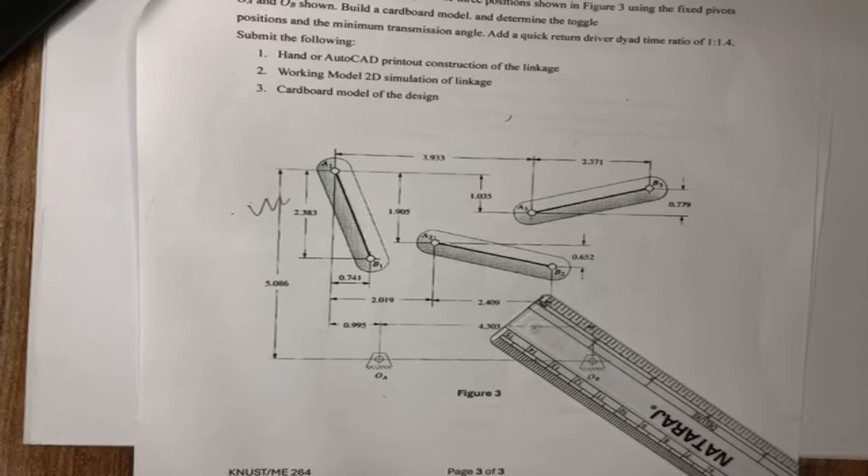Okay, then I think we can begin. So the video is lagging, right? The stream is lagging. I don't know why. Okay, let me try. Whatever happens, let me know in the chat. All right, I'm looking at it. Okay, can you see? Okay, I think everybody can see them.

So let's begin with assignment 6. So this is a fixed pivot problem. The question says design a 4-bar mechanism to give the 3 positions shown in figure 3 using the fixed pivots OA and OB. Then you're supposed to build a cardboard model and determine the toggle positions and the minimum transmission angle. And then add quick return driver dyad. That's the time ratio 1:1.4. Okay. So let's get into it.

So yeah, I know, but can you follow up? I understand it's lagging, but can you follow up? All right, sure.

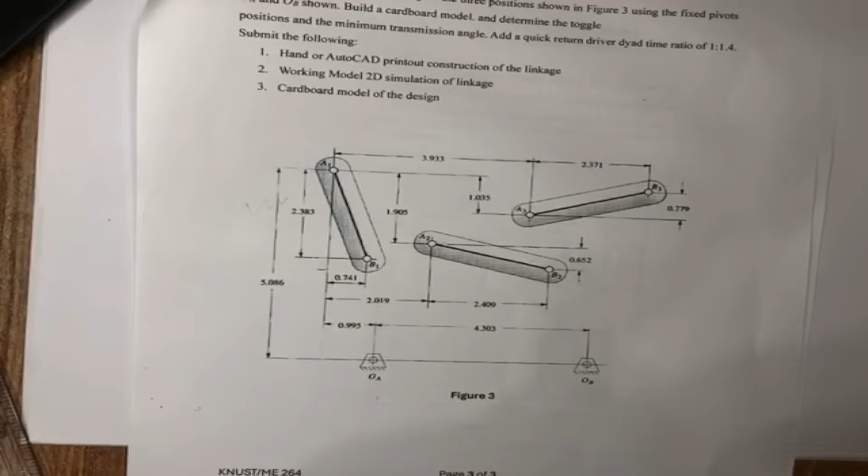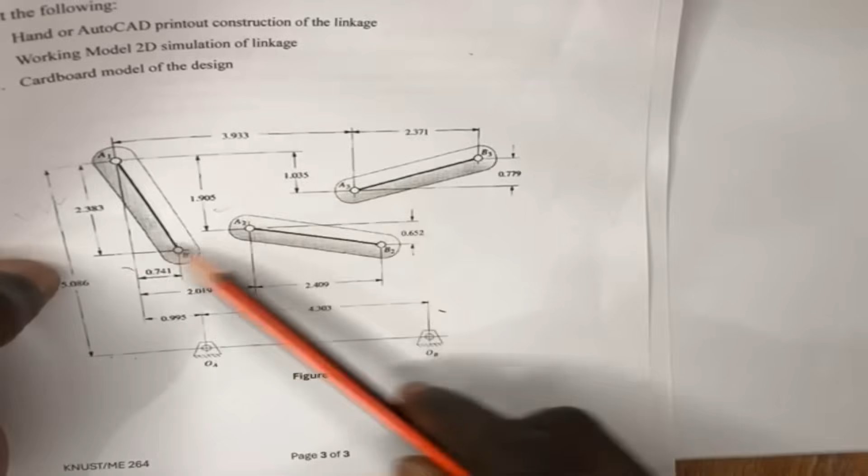So we are going to work on this, which is a fixed pivot problem, or a specified fixed pivot problem. Now you could see that on the diagram you've been given some numbers, right? These numbers are there such that if you want to redraw this on a white sheet, you use these numbers to transfer them from here to here. Under normal circumstances we should use something like AutoCAD to draw these links and then print them before we work.

Now you can choose to work on it, but because of the numbers it will make your work very messy, right? So I want to transfer them onto the page, and this is what I'm going to do. Just align the sheets on one of my A4 sheets. I hope you all have your questions and solve with me. Don't just watch, have your assignment by your side and work as I do. Any question you have, let me know in the chat and I'll respond.

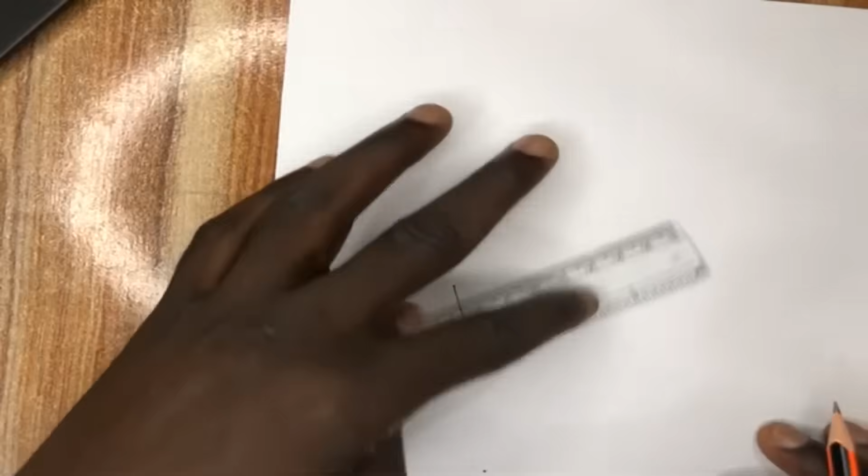So instead of redrawing them, I will just use the divider to locate my points. So this is for OA, OB. And I'll locate A1, B1, A2, B2, and then A3, B3. All right, so having done this, I will now come, so this is for OA, OB, and then A1, B1 is here. Then A2, B2, and then A3, B3.

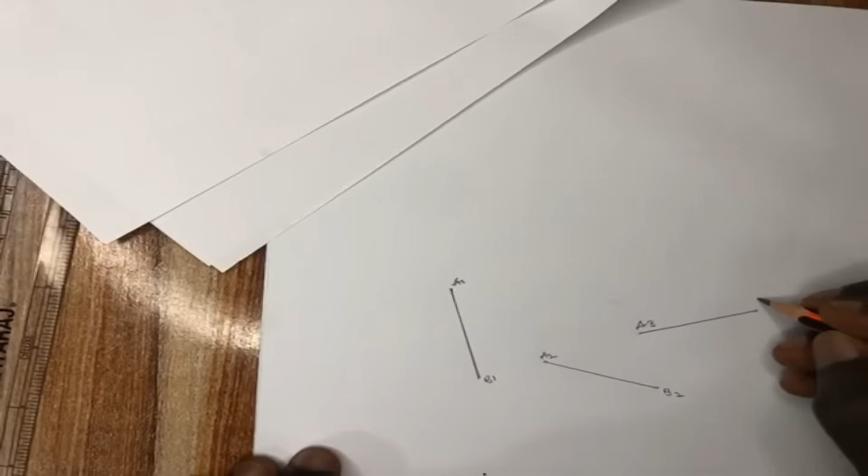All right, so A1, B1, A2, B2, A3, B3. Okay, so this is what we have now. Let me label this one OA, OB.

So now, from our understanding of the fixed pivot method, we have to relocate the other positions. First, we will assume the specified fixed pivot as the moving link, and then use the triangulation method to locate the other two positions. Then we can design the linkage, and when we finish, we do link transformation. So knowing that OA, OB is our specified fixed pivot, I want to make it a link.

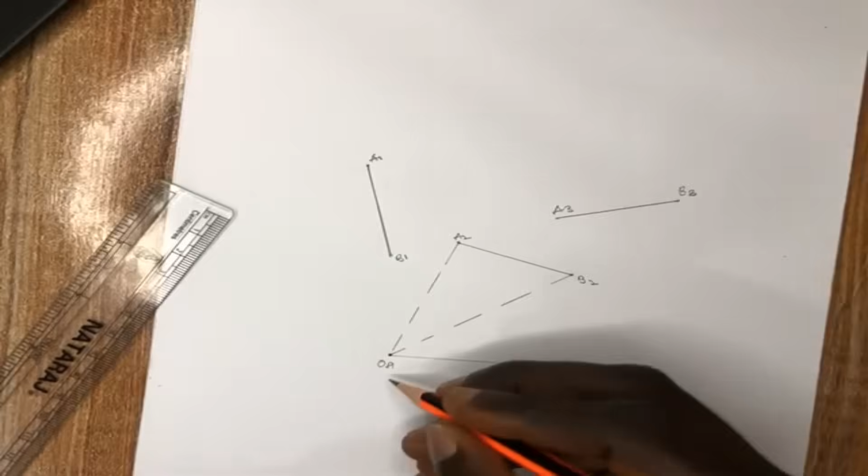All right, then I'll use the triangulation method. So let me just use some short dashes. So with A2, OA, then B2, OA. So instead of using OA and OB, well, we can use that, or I can just make this one E and this one F, anyone you want.

So you use your compass, you pick the distance from A2 to OA, then you come to A1, you make an arc, then you come to B, OA, you come to B1, you make an arc. So where it meets becomes our OA prime, or we can make it E2. So this one will become E1. Any one of your choice. Great. Then you will do for F2. So you join these with short dashes.

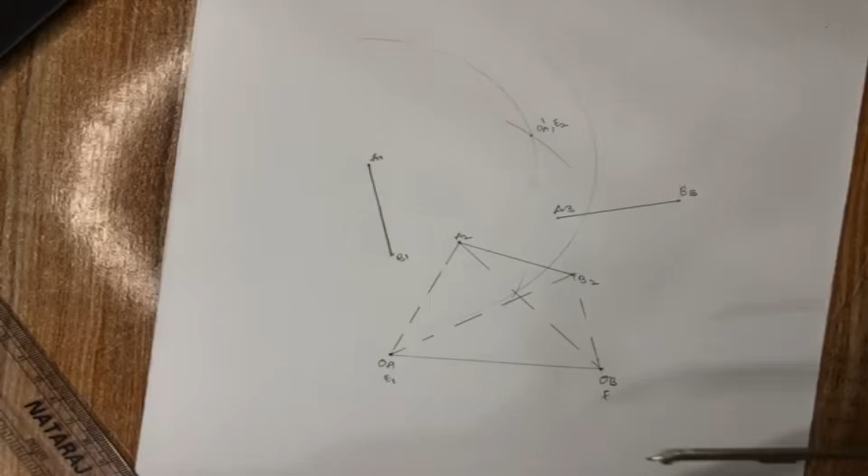Then you measure A, OB. Then you come to A, make an arc. Then you come to B, make an arc. All right, I'm coming. So A, OB. It's an arc. And then B, OB. Okay.

So the B, OB, this triangle can only meet at this point. And where this one meets is far away. Let's check the distance first. So from here to here is 6.9. Oh, okay. The same. All right. So this one will meet somewhere here. So you make this one F2 or OB prime. So that will give you the second position for the link E1, F1.

Don't forget, we have just changed OA and OB to variables E and F so that writing them will be easier for us. So here, our OA prime will become E2, and our OB prime will become F2. Okay, so now that we are done, we will use triangulation with A3, B3, and then find the third position for the specified fixed pivot.

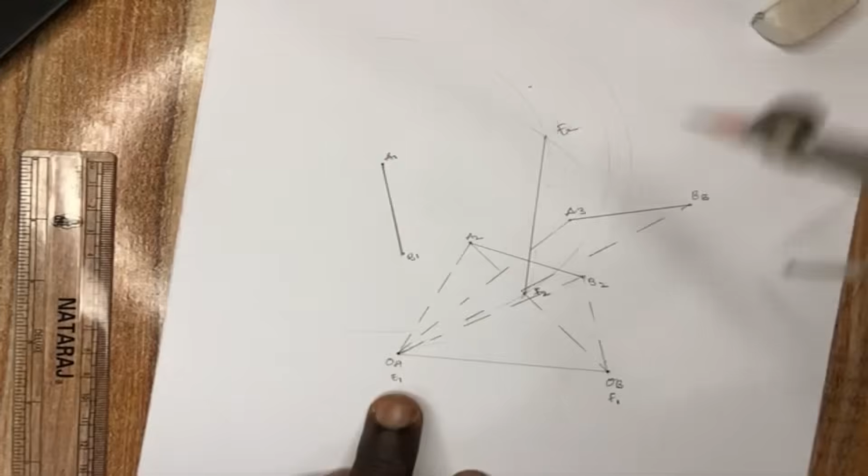So that's to join A3 to this, and then B3 as well. All right, so A3 to E1, B3 to E1. So you pick A3, E1, you come to A1, you make an arc, and then B3, E1, you come to this. Okay, it's meeting somewhere there. So we have E3 somewhere here.

Then we join A3 to F1, B3 to F1.

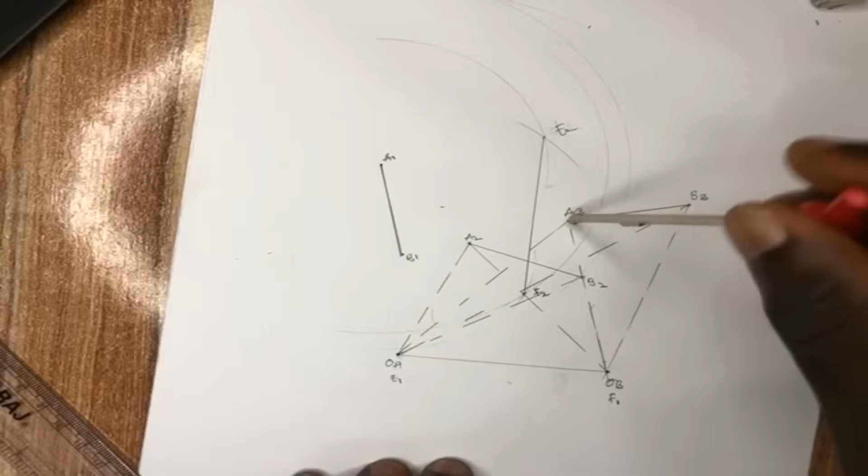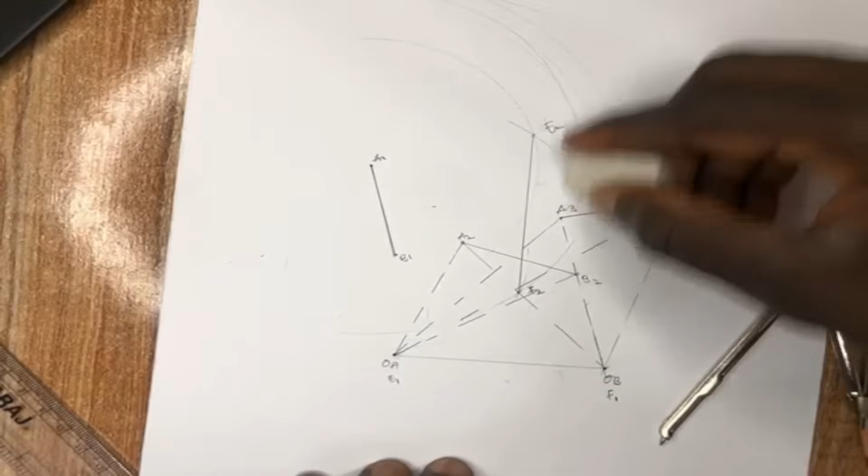Then pick this, you come to A1. The lines are very messy, so we just have to stick with the method. So A, F1, we come to A1, make an arc, and then B, F1, we come to B1, make an arc. So that one also met here, and that gives you your F3. So if you join, you have E3, F3 here. So our three links are the E1 F1 link, E2 F2 link, and E3 F3 link.

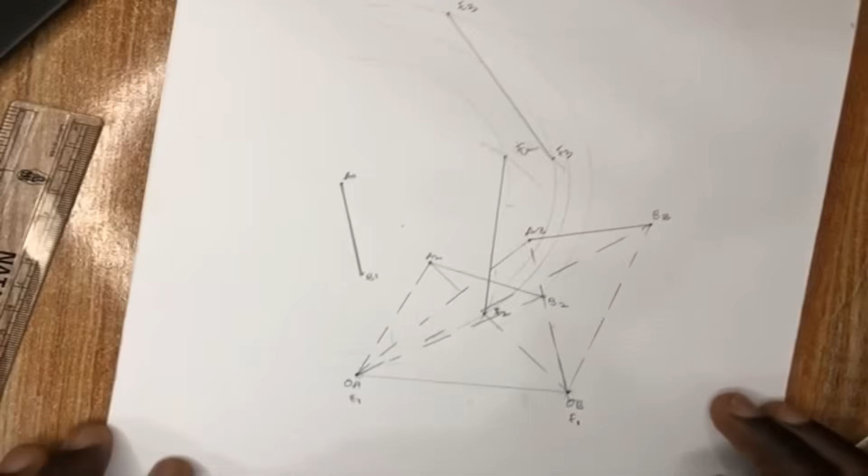So now that you found the three positions for the specified ground link, the next thing is to design a rocker output for the new links that you've generated. We do that by joining. My work is very messy, so just follow what I say. We have three links: E1 F1, E2 F2, E3 F3. We follow the normal process of drawing a rocker. You join E1 to E2, E2 to E3, do the bisection, then F1 to F2, F2 to F3, do the bisection and locate the pivot point. If you are following, you can do this at your end.

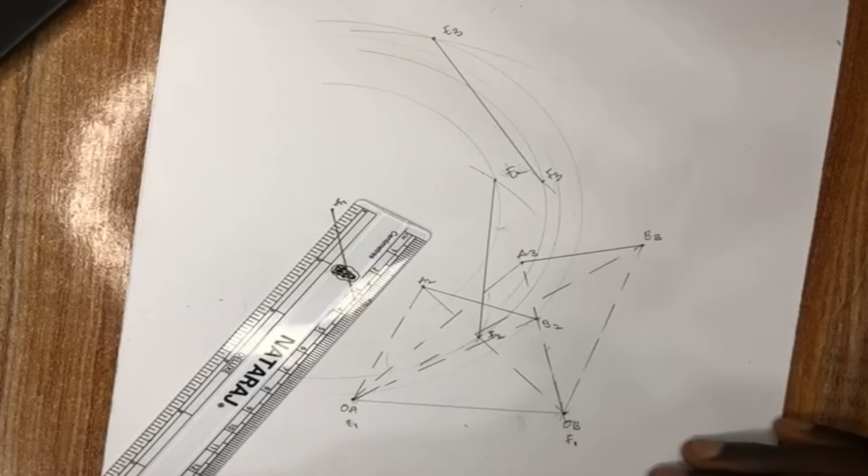Okay, so we join E1 to E2 with short dashes, and then E2 to E3 with short dashes. Then we bisect them. And then we come to E2, E3.

Okay, looks like it won't fit on the page. In your work, since this question hasn't been solved before I began, maybe you can just reduce the length. They gave us the values, right? So you can use a scale to scale them down so that it fits the page. For the sake of the work we are doing, I'll just extend the sheet a bit and do it on it.

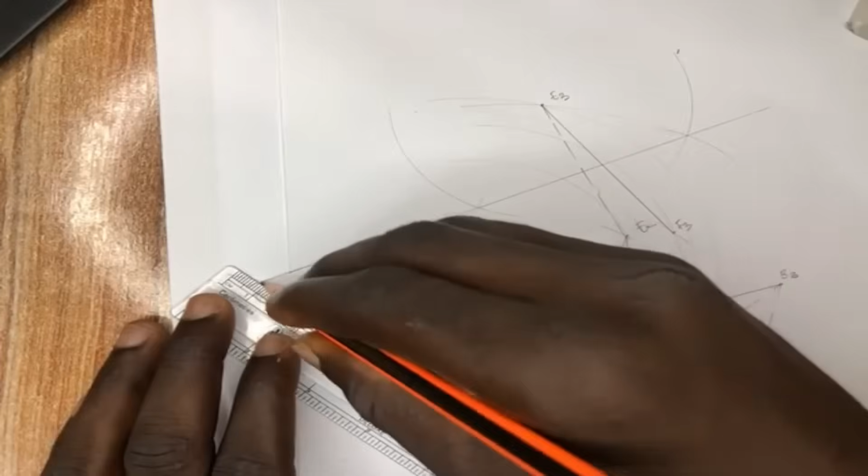Okay, so this will give us the fixed pivot for E. We can label that, say, O2. No, let's make it G, right? So you connect E1 to G, E2 to G, and then E3 to G.

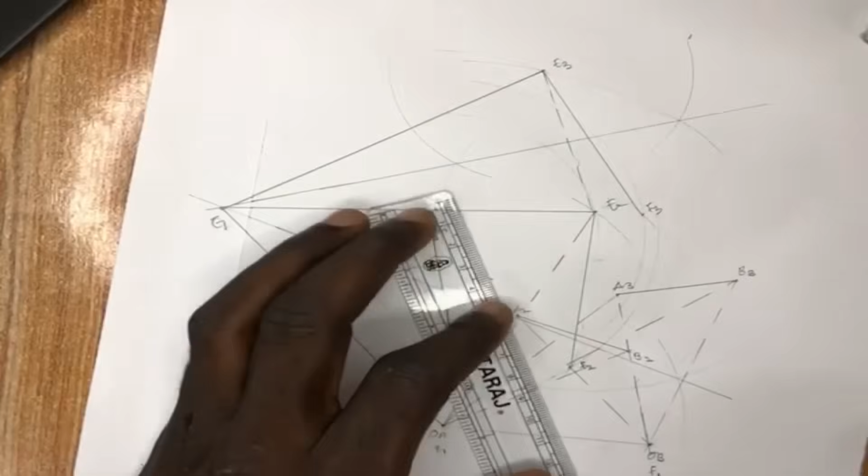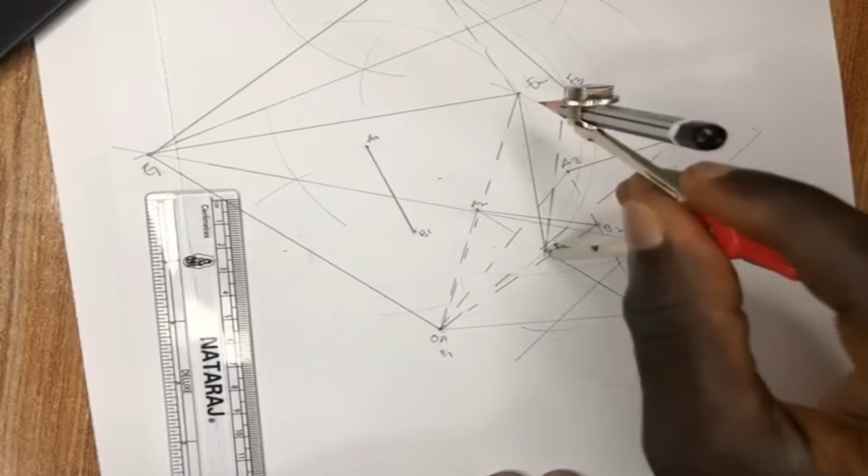Next is to locate the center for F. So we join F1 to F2, F2 to F3. F1 is here, F2 somewhere here, and F3 is here. All right, so F1, F2, and then F2, F3, more than half.

All right, then we join this one. So they meet here, and let's say this will be our H. So we join F1 to H, F2 to H, and then F3 to H. Up to this point, who has any question before we move on? It's very clumsy. What I'm saying is that the ground points H and G are moving this link from this position to this position and to this position.

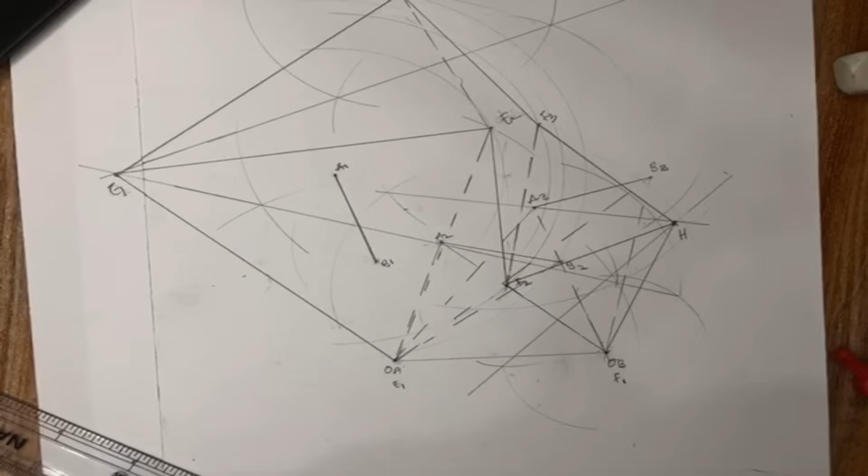So the next is to do the link transformation. What I'm going to do is change the ground point from G and H to this, and then this one will become a moving link. How do I even join this? Okay, let's join the GH link. The GH link becomes a moving link now, and this will become a pivot link.

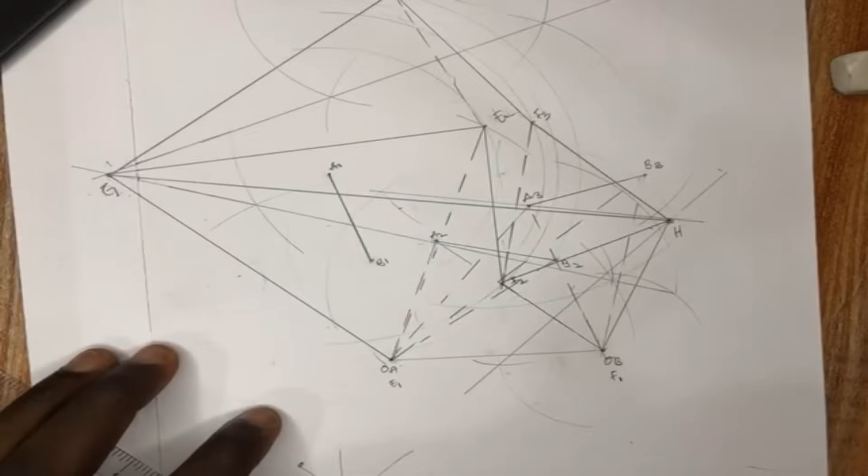So if we do that, this link is holding this here, this is holding this here, so this one becomes our output link. Now I'm trying to find a way that this one will be here. So position 1 will be here. Position 2, where should it be? Will be here. And then position 3.

Coming. So let's just go right now. I'm not being able to see. The work is very messy. I need to locate the three positions for the output link, which is the GH. All right, give me a minute.

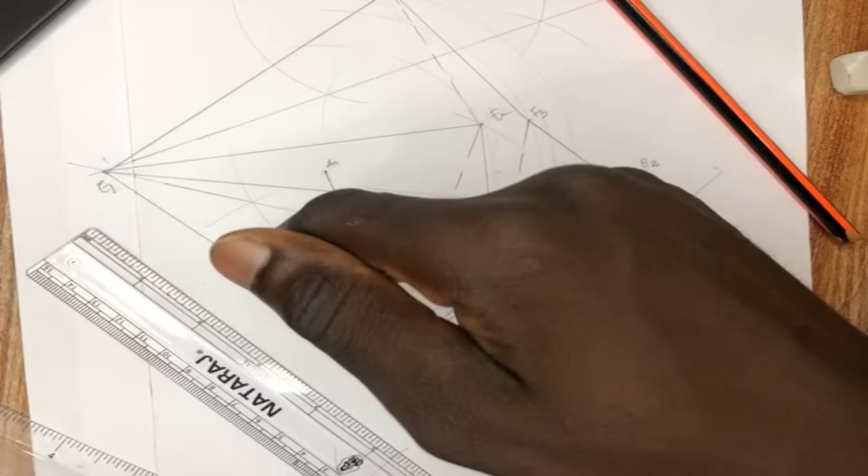All right, let's do this. I need to sit down and then check it very well. So before we can add the dyad, we need to locate the 3 positions. You know, the ground link. Now we will have the GH as our link now. Now at position 1, we will have AG connected to the link here, and then this connected here.

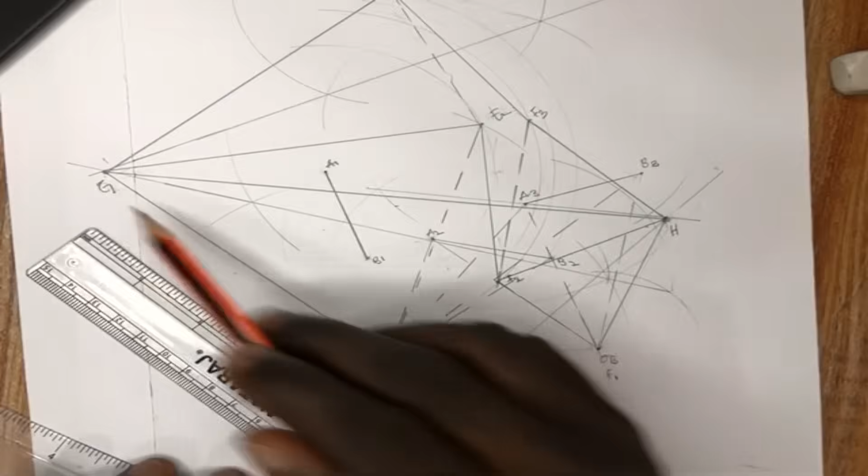So at position 2, now we need to be able to transfer this line, right? All right, so this is what we're going to do. We will pause this one on this level. I believe up to this point everybody understood, right? So we will pause on this one. After this session, probably this evening, I'll take my time and go through it and send the solution to you, or probably record it and send them to you. So we will end on this, the fixed pivots on this one here.

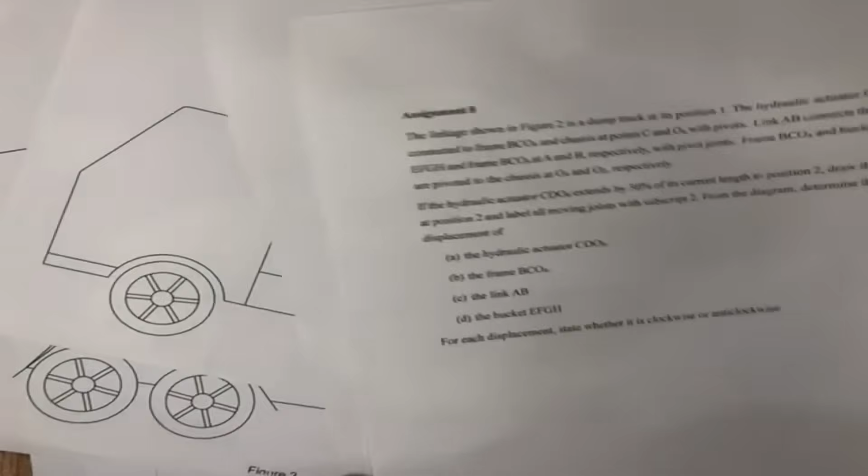All right, so let's move on to the position analysis, which are the other assignments. Now this. Okay, so we have this one, and then this one as well. Okay, and then we have this. We're doing the dump truck assignment 8, figure 1, and then figure 2. So let's work with this first.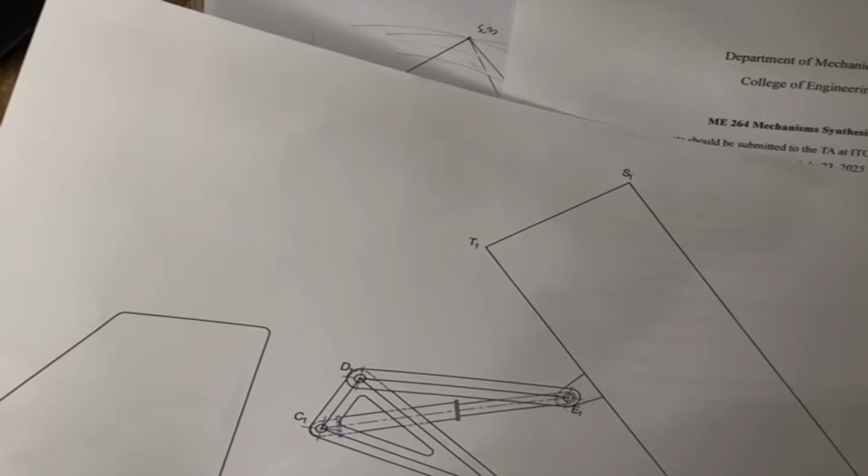All right, so in this, there is a linkage shown in figure 1, which is this one. It's a dump truck at position 1. The hydraulic cylinder CE. So where's the E? I'm coming. They've changed the diagrams. Okay, CE. This is the hydraulic cylinder. The hydraulic cylinder CE is connected to the bucket QRST, which is here, at point E with a pivot.

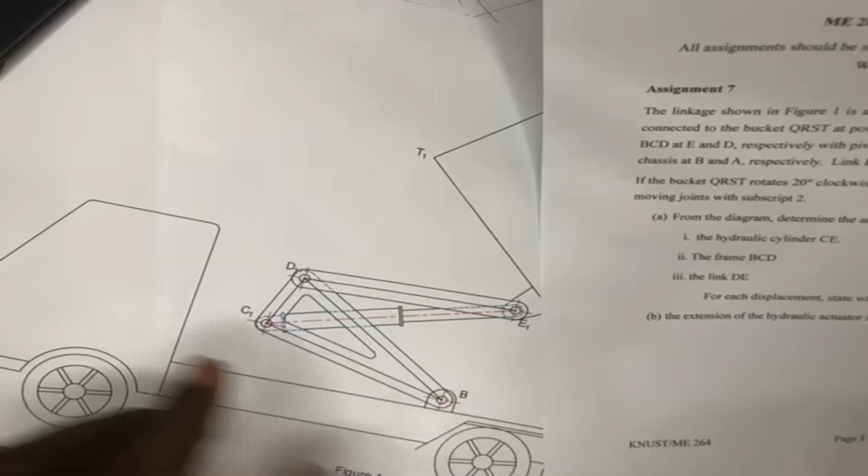Link DE, which is this link DE here, connects the bucket and frame BCD at E and D respectively with pivot joints. Frame BCD, this frame BCD and bucket QRST are pivoted to the chassis at B and A respectively. Link DE is connected to pivots D and E. I think that one has been mentioned.

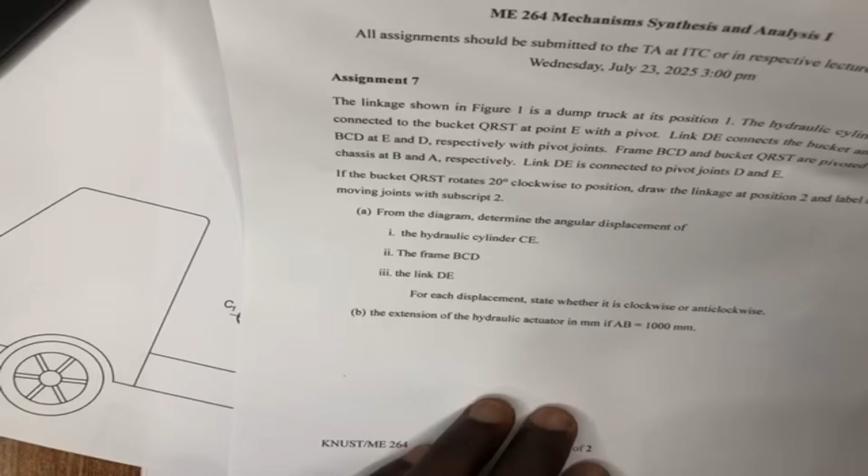If the bucket QRST rotates 20 degrees clockwise to position 2, draw the linkage at position 2 and label all the moving pivots as subscript 2. On the diagram, determine the angular displacement of the hydraulic cylinder, the frame BCD, and the link DE. For each displacement, state whether it is clockwise or anti-clockwise, and then find the extension of the actuator. Okay.

All right. So what they are saying is that the bucket here has rotated 20 degrees clockwise. Okay, so if we rotate the bucket 20 degrees clockwise, which is to say the points here, okay, let's do this. First off, I need to have a line that is rotating by an angle of 20 degrees. All right.

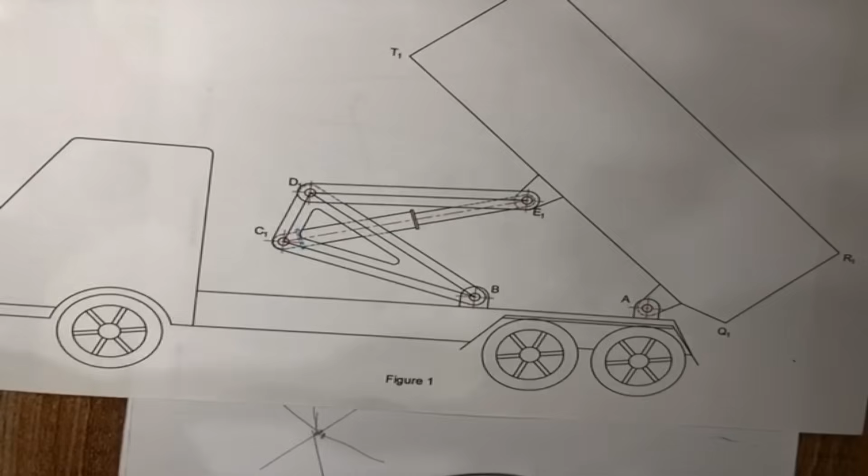Okay, so let's just join E and A. So EA is a link joining point E and point A on the bucket. So if the bucket rotates by 20 degrees, EA will also rotate by the same angle. Now that we know EA is a link on the bucket, we measure 20 degrees in a clockwise direction. You align the center of the protractor with the center here, because that's where the rotation is happening. The whole bucket is rotating about this point.

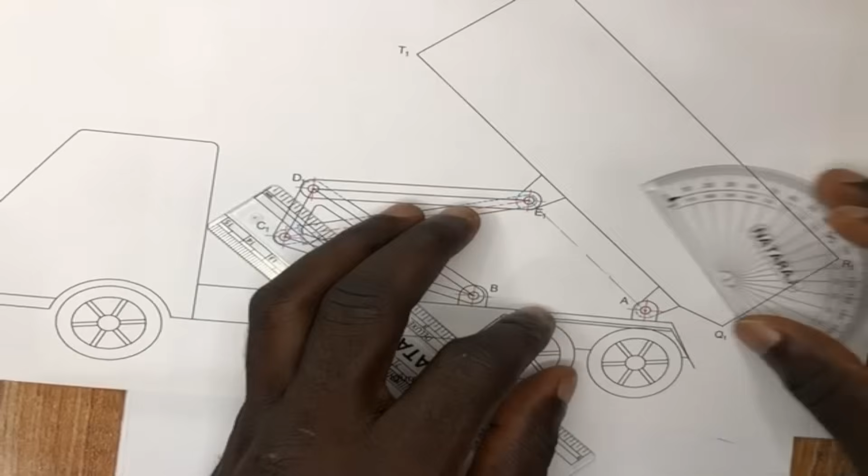So you put your center there, and then you make the zero line align with the EA line, and then you measure your 20 degrees, which is somewhere here. So from this pivot point, you draw a line. So that means E will be along this line. We know that point E is going to rotate about A at a fixed distance. So you just put your compass here, and then here, and then you can make an arc like this. All right, so make an arc.

So where the line meets the straight line you drew becomes your point what? E2. Okay, now you know E2. What you also know is that the distance D to E is fixed. So just put your compass and take the measurement from D to E, and then stand at E2

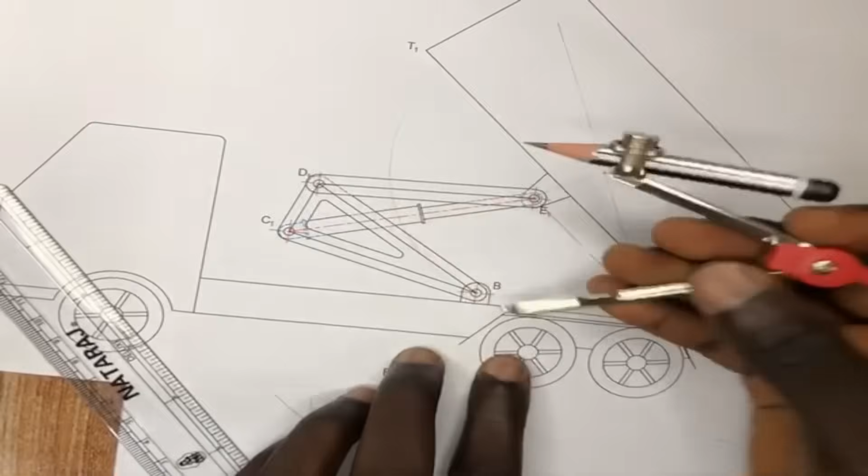and make an arc. Another thing you know is that the point D is rotating about the fixed point B. So you put your compass at the center here, and then with DB as your fixed radius, you make an arc. The D is rotating about B, so it can go this way, and then the distance between D and E is also fixed. So you take the distance from here and make an arc. So where those 2 arcs meet will become your D2.

All right, now the distance between D and C is fixed. So you stand here, and then you take the distance DC. Then it comes to D2 and make an arc. You also know that C is rotating about B as well. So you come and stand here as well.

Come in. My compass is loose.

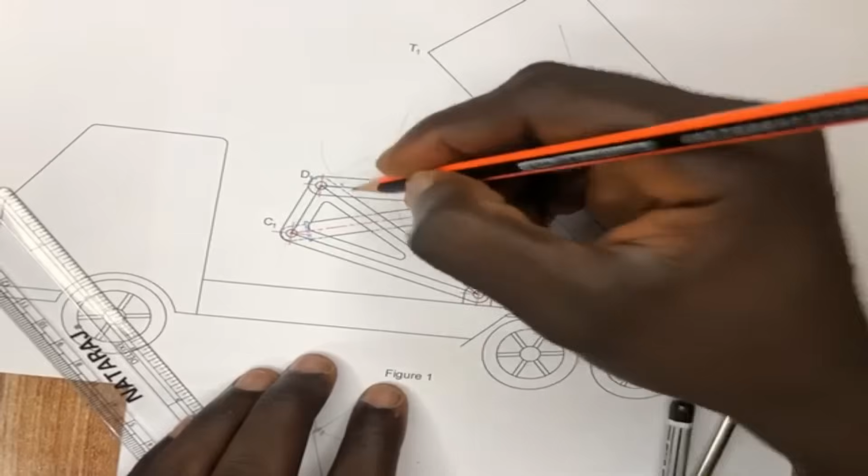Okay, so these are fixed points, and C, make an arc. So where the arc by rotating about B meets the fixed distance DC, which is somewhere here, that will become our C2. All right, so we have E2, D2 somewhere here. And then D2, C2 will be somewhere here. And then we have your C2B here. All right, so that is that. Now we have the position 2 for C and D and E as well.

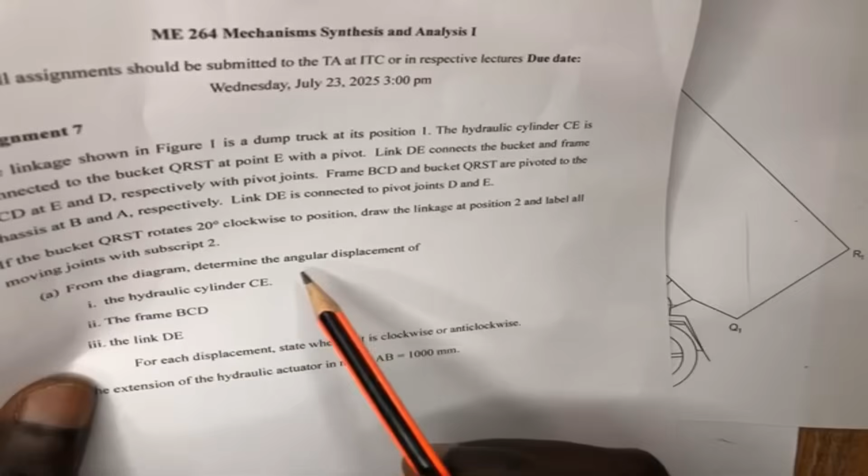The question says we should find the angular displacement of the hydraulic actuator and the frame BCD and the link DE. So first, the hydraulic actuator CE, so here will be your C2, E2, right? Maybe you can use some short dashes. Okay, and this one is C1E1. So to measure the angle, maybe you can just extend them till they cross each other, and then we use that as our fixed point to measure the angle. So if I draw this line and then I extend the CE line as well, I'll have a fixed point here, right?

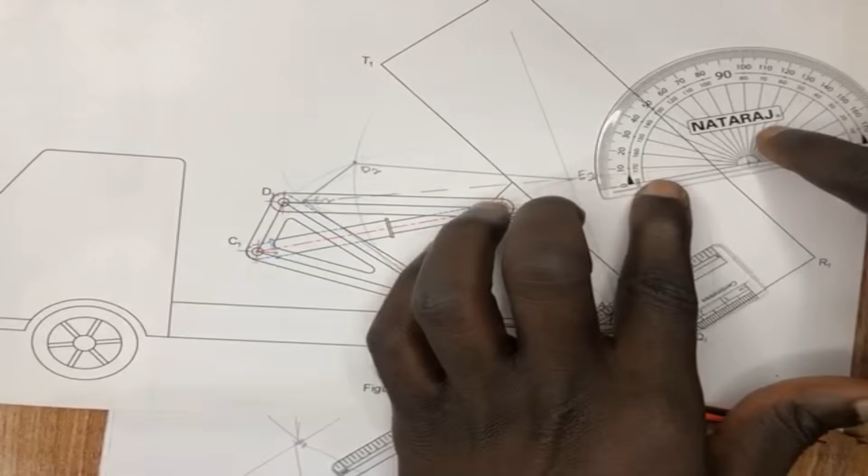So I'll put the protractor there. Good. And then I'm having 7 degrees. So theta for CE, I have 7 degrees. And you could see that's clockwise, right? So theta for CE is 7 degrees and it's what? Clockwise. And then the next one is the frame BCD.

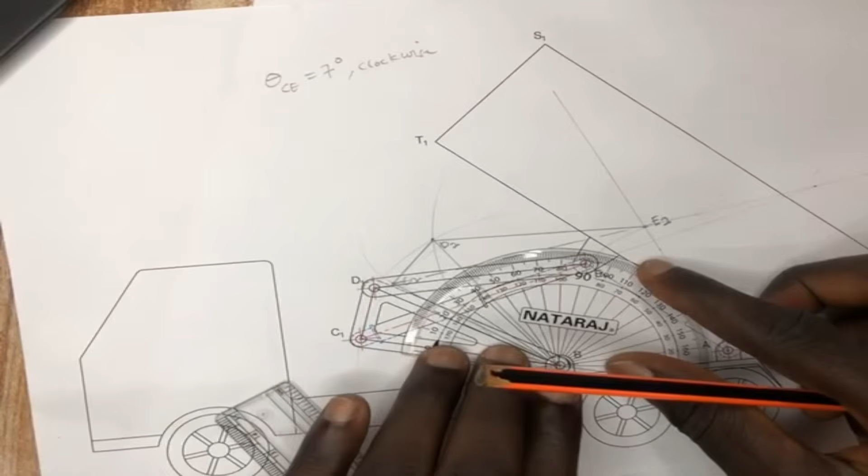Now you could see the frame BCD, if it rotates, the same angle of rotation will be for the link CB as well, right? I have not even joined D to B. I can join them as well. Let me just join. Okay, so you can just measure the angle between D1B, D2B, or C1B, C2B. They should all give you the same answer. You put your center there, and then you let the line align with C1B, and then you take the measurement for C2B, and that is 23. All right, so theta for the frame BCD is 23 degrees, and that is also what? Clockwise.

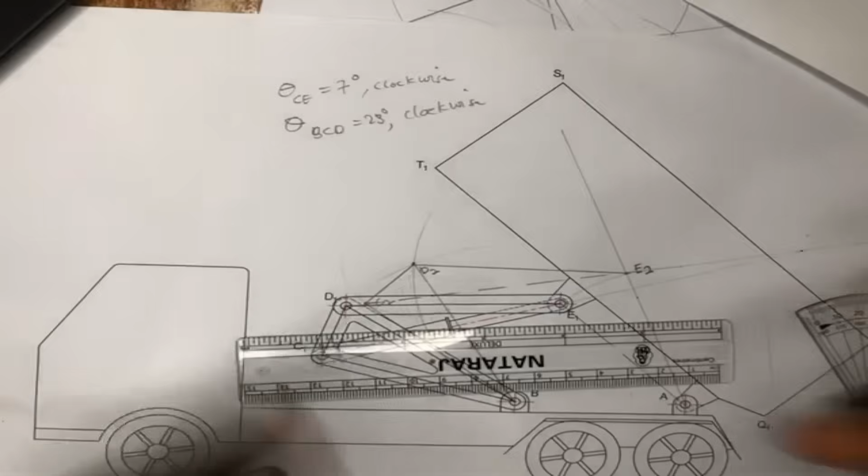And the last one, you are supposed to find the displacement for the link DE. Okay, so DE is here. We have DE here at position 1 and DE2 here at position 2. So you see, it becomes a bit difficult finding the angle. So you just have to extend them until they meet, and then use that meeting point as the center of rotation and measure how this one has rotated from the other.

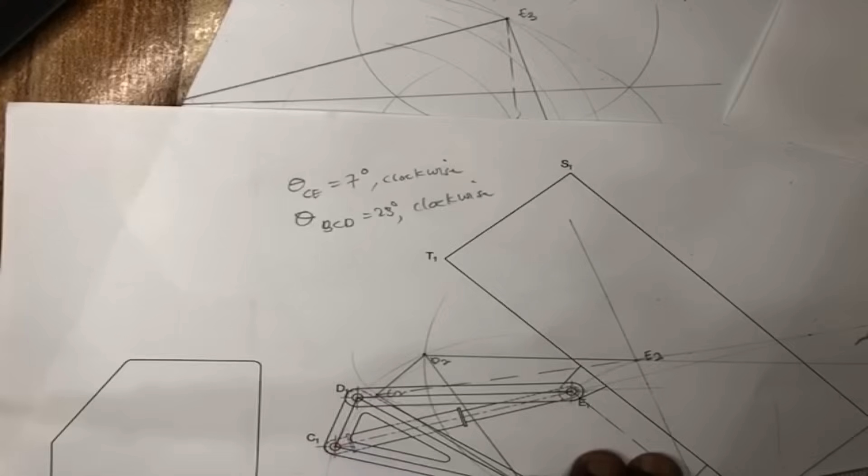So extend this, and then the meeting point is very far. I'm not going to get a meeting point at all. Come in. We have it here. Let's just try the other method we did for the other one. Because apart from that, I don't know which method we can use to measure the angle.

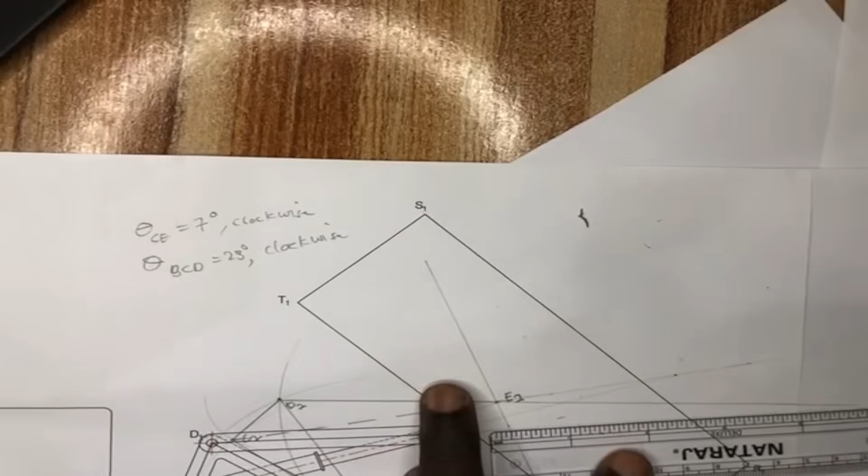So we need to make sure we have a fixed point to measure the angle D2E2 is making with D1E1. All right, and for that we need to extend the line D1E1 and then the line D2E2. All right, so they are meeting somewhere which is off the sheet. So somewhere here. All right, so I can stand at that point. Okay, so I have five degrees. So theta for DE, I have 5 degrees, and that is clockwise as well.

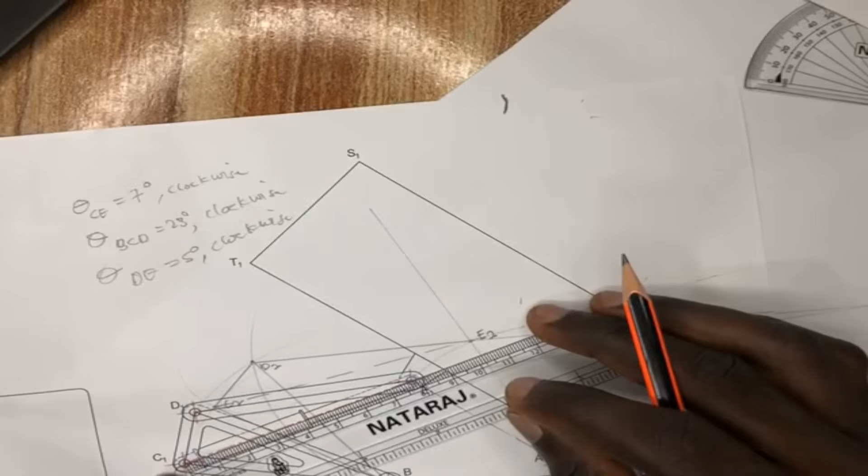Okay, so we are done with that, and then they're asking us to find the extension of the hydraulic cylinder. So first I have to take the measurement, the CE length, which is from here to here. C1E1 is 7.8. Then C2E2 we have 8.4. So the extension will be equal to 8.4 minus 7.8, and that will be 0.6. Oh wait, 8.4 minus 7.8.

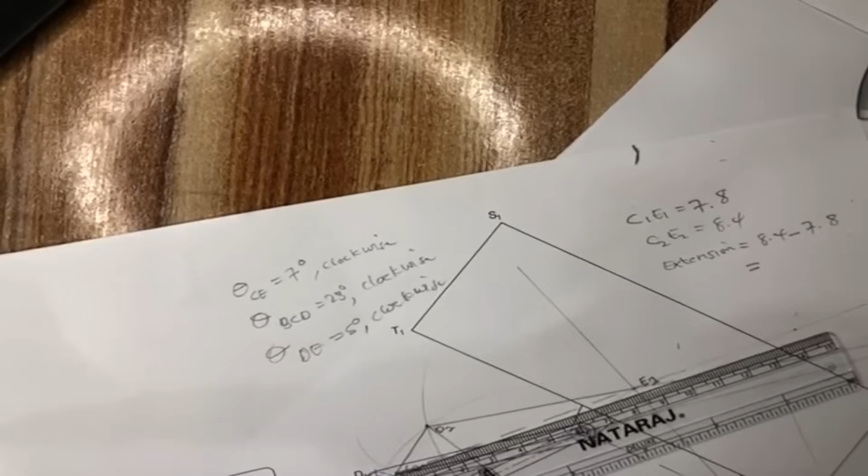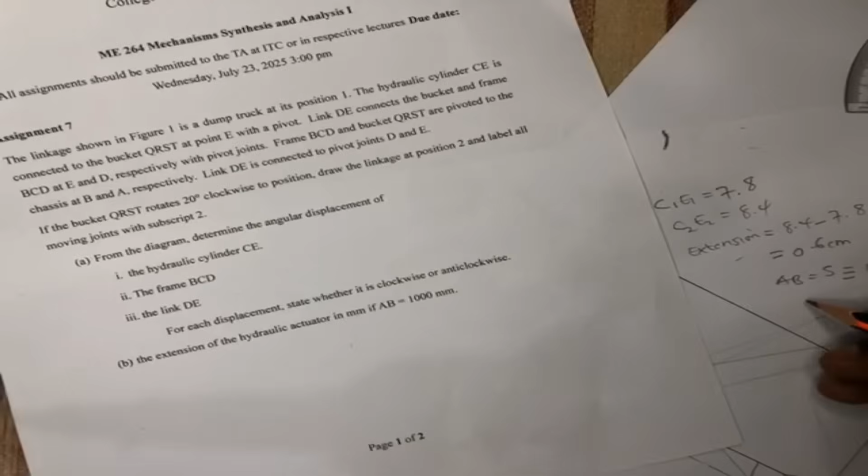Yeah, 0.6. So you have 0.6 cm here, and they are saying that what we measure here, the AB length here, is 5. So AB, which is equal to 5, is equivalent to 1000 mm, right? So the extension, which is 0.6 cm, will be equal to what?

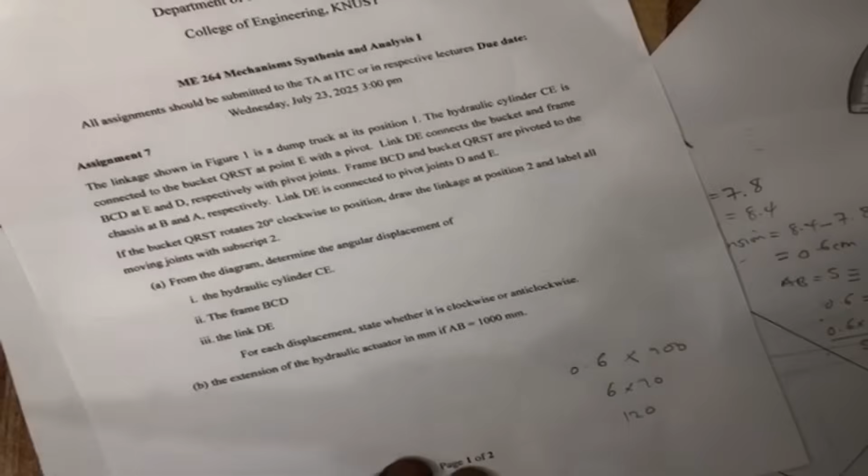Right, so that will be 0.6 times 1000 all over 5, and that will be equal to, I don't have a calculator, so I have to do it off it. So we have 0.6 times 200, 6 times 20, and that will be 120. So 120 mm. All right, so the extension of the hydraulic actuator will be 120 mm using the scale given in the question.

So that's for this assignment. I mean, the assignment 7. All right.

SRC week we don't learn. Okay. Don't forget, just after the SRC week is exams week.

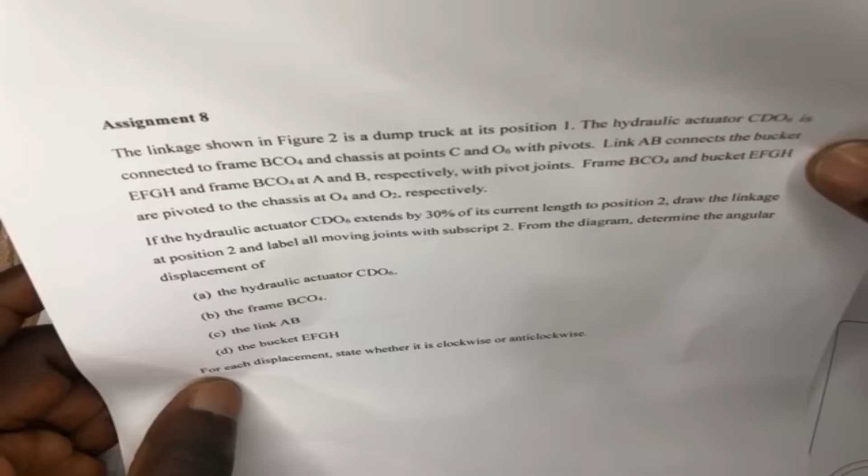All right, so assignment 8, which is the same as what we just did. So the linkage shown in figure 2 is a dump truck at its position 1. The hydraulic actuator CDO6 is connected to the frame BCO4. So this is the frame B, where's the B? BCO4. So this frame. All right.

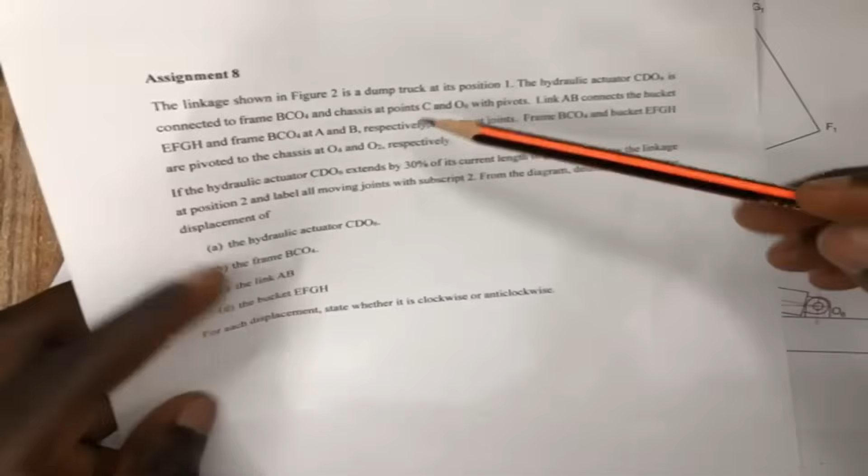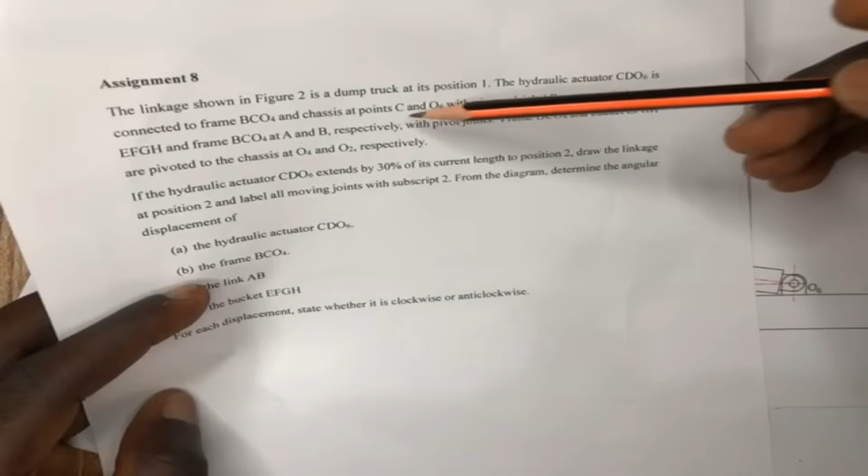And then also we have the hydraulic actuator CDO6 connected to the frame BCO4 and chassis at C and O6 with pivot. Link AB connects the bucket EFGH and frame BCO4 at A and B respectively with pivot joints. Frame BCO4 and bucket EFGH are pivoted to the chassis at O4 and O2 respectively, which is here and here.

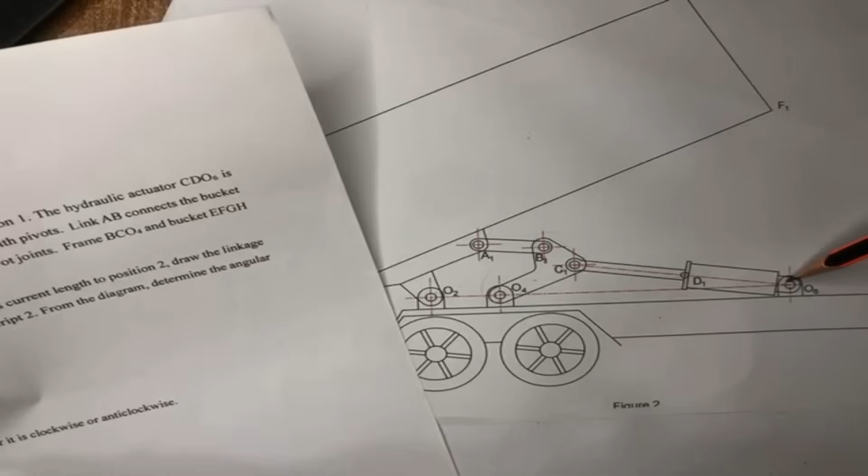The O4 and O2, right? So the frame and then the bucket are connected to the chassis at O4, O2. Okay, so if the hydraulic actuator CDO6 extends by 30% of its current length to position 2, draw the linkage at position 2 and label the moving joint with subscript 2, and from the diagram determine the angular displacement and all of those. Okay, let's get into this.

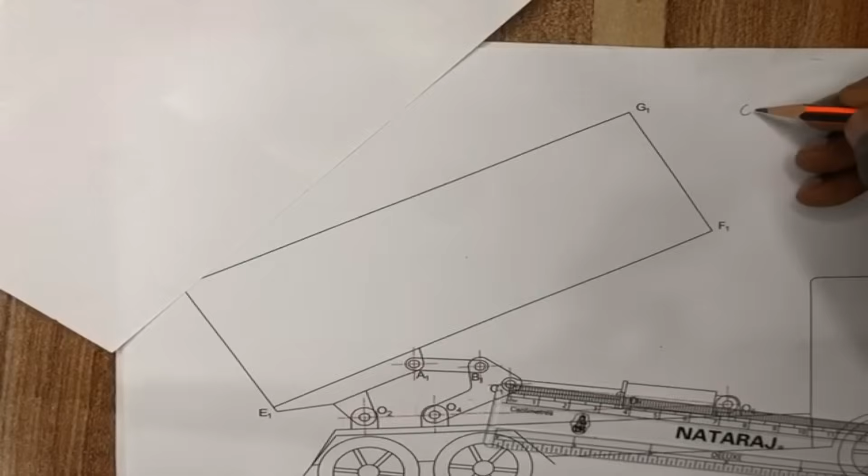So this time what I'm saying is that the hydraulic actuator has extended by 30% of its current length. So we are going to measure the total length C1O6 multiplied by 30%, and then we add to the current, or we just do the percentage increment. So from here to here, the current length is 7.2. So C1O6 is 7.2 cm.

Okay, sorry, I think the network is not really good for me today.

So C1O6 is 7.2, and then I'm going to increase by 30%. So as total length after extension, let me say C2O6 will be 130 over 100 times 7.2. So it'll be 1.3 times 7.2.

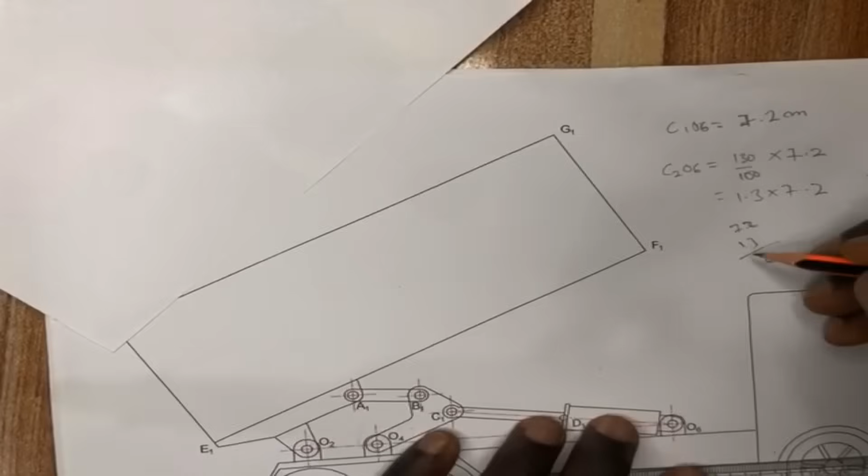I don't have a calculator here. What do I do? Then 13, 6, 21, 2, 7, 6, 39. So 9.36. So the new length C2O6 will be 9.36 cm. All right, so we measure 9.36 from the straight edge. 9.36 is approximately 9.4. So 9.4, and then you come to O6.

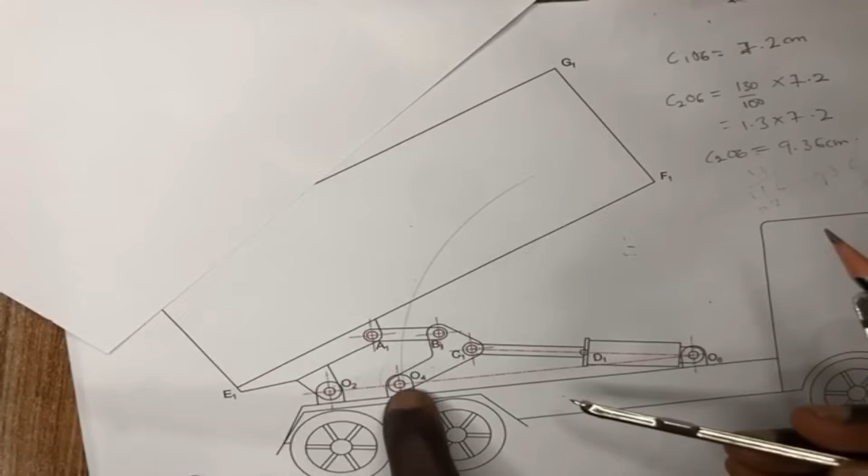Since the hydraulic actuator is pivoted at O6, no matter where it extends, it's going to be on a certain arc because the C is going to rotate about the O6. So you create this arc and say that the point C will be along this arc after the extension of the hydraulic actuator. But you also know that there's O4C1. C1 will also be rotating about O4, and that distance O4C1 will always be fixed. So we take the length O4C1.

You don't even have to move, you just have to stand at O4, with O4C1 as your radius. You make an arc, so where they meet will be your C2, and this is where the hydraulic actuator will be at position 2. So you can just join C2 to O6, something like this. All right, so this is your C2.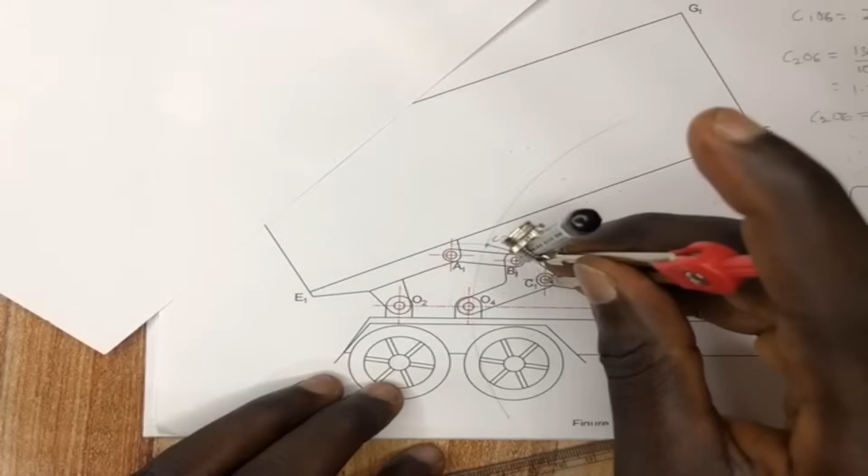Now the next is to find B2, right? And you know BC, the length is fixed. So you measure B and C, or you take the length BC, so we stand here, then you go to C2, make an arc. But you also know that B will also be rotating about what? O4. So you stand at O4 with O4B1, make an arc. So where they also meet becomes B2. So you can join them.

Okay, what next? A, right? Now the point A is having a fixed distance from B and rotating about O2. So you take the measurement B1A1, come and stand at B2 and make an arc. And then O2A will rotate with a fixed distance. So you come and stand at O2 and put your compass at A, and then make an arc where they meet to become your what? A2.

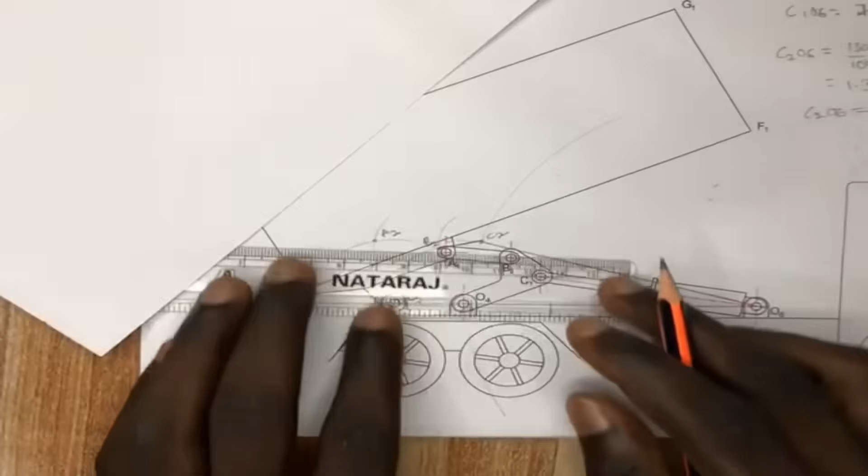So we have something like this, and then something like this. All right, so we are done. We've located C2, B2, A2. So we are done. The next thing is to find the angular displacement of the hydraulic actuator, the frame BCO4, which is this one, the link AB, and the bucket EFG.

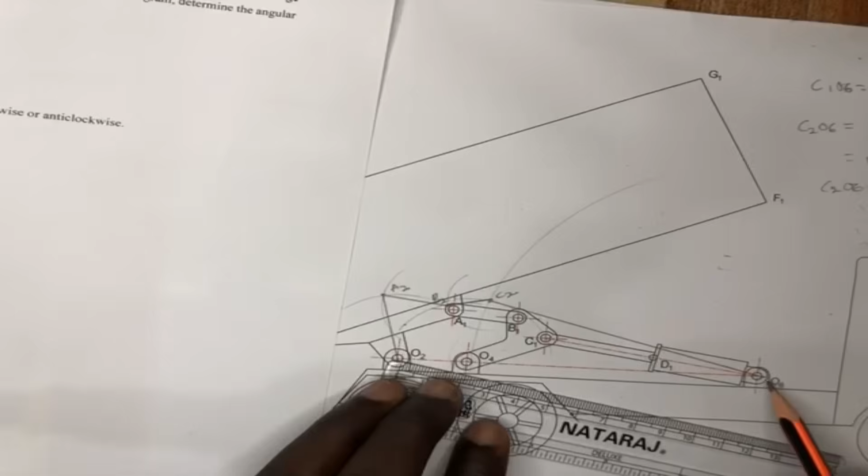Okay, so let's begin. So first off, we know C and D are rotating about this point, right? So the angle here, theta, is just the angle we are measuring as the what? The angular rotation of the hydraulic cylinder. So I believe you all know how to measure angles by now. So you locate the fixed point of rotation, and then you align the zero line with one of the lines, which is in this case C1O6.

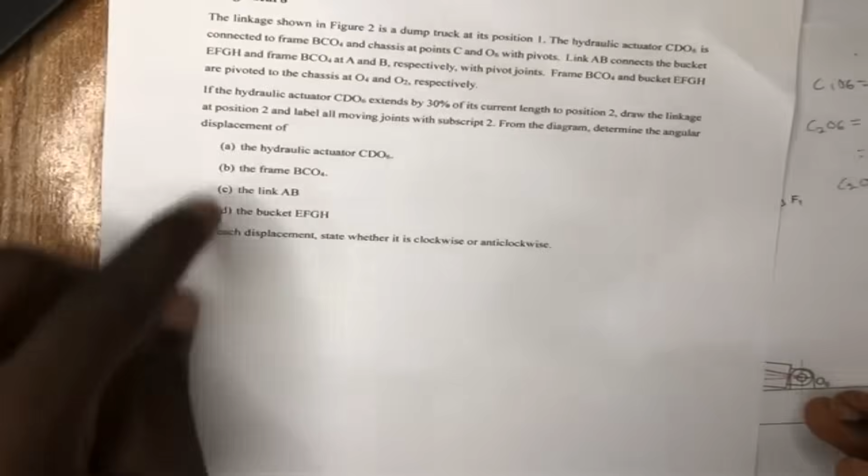Then I will measure C2O6. So I'm getting 8 degrees, right? So theta for CO6 is what? 8 degrees, and obviously that is what? Clockwise rotation. The next is to measure the angular displacement of frame BCO4.

Now BCO4, the rotation of O4C1 to O4C2 will be the rotation of the whole frame, right? So just join C2 to O4 and measure the angle between C1O4 and C2O4. So as usual, you find the fixed point, you align with one of them. Okay, so you should extend O4C2 so that you can see the measurement clearly, but it probably might not align on any number for you.

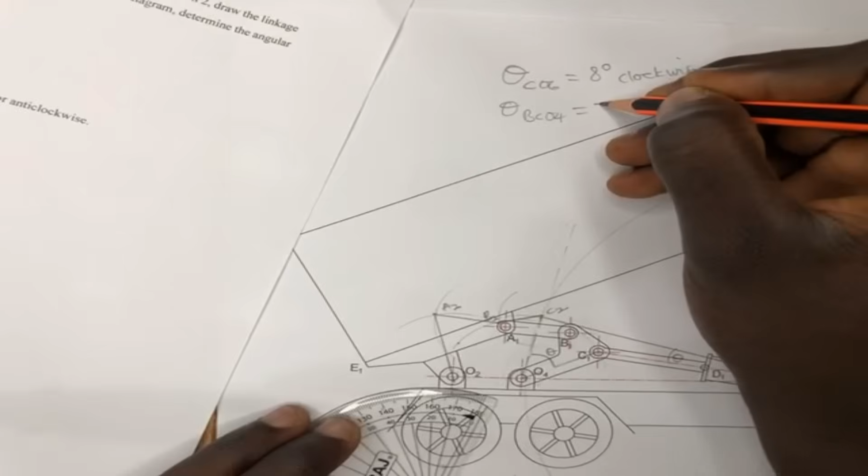So if we do that, we have it at 52 degrees. Yeah, we have it at 52 degrees. So theta for the frame BCO4 is 52 degrees, and that is what? Counterclockwise, because it's rotated this way, right? So it's going against the clock. This one went along the clock. So you found the frame.

The next is BA. So the BA, you just have to extend it so that it can cross the line joining AB. So where is AB? The AB line is here. All right, so if we extend, don't do it deep though. So you just have to extend the line. You just want to find the fixed point of rotation. Without the fixed point of rotation, you can't do the measurement.

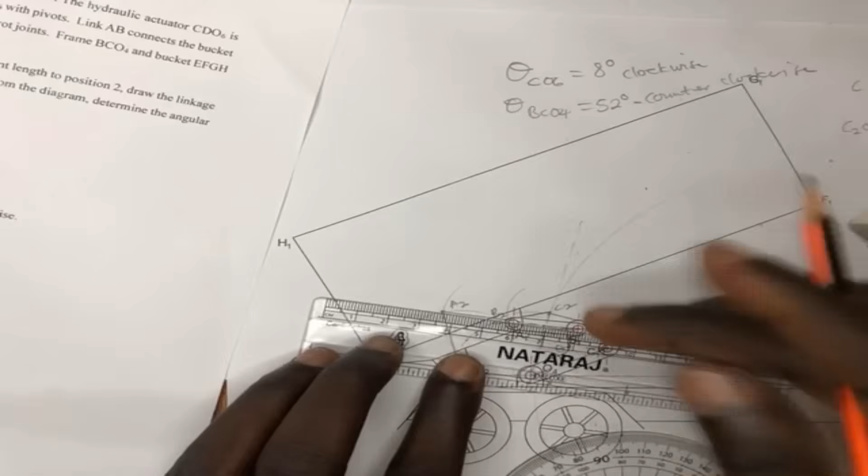So this time, you put your protractor somewhere here in the center. You align with the red line. Okay, I'm getting 6 degrees. So the angle theta for AB, I have 6 degrees, and that is also clockwise. That's also clockwise. The next one is the bucket EFG.

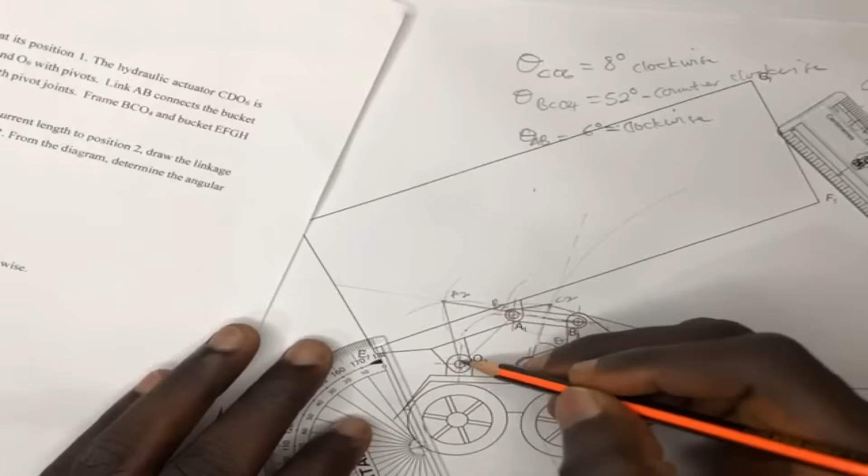Now the bucket EFG will rotate the same as the line joining AO2. All right, so A1O2 is here, and then A2O2 is here. So the angle here, don't forget A is attached to the bucket. So as A rotates, the bucket is rotating. So the angle for A's rotation will be the same angle for the bucket's rotation at the fixed point O2.

So you put your center there, you align with one of the lines, then we have a perfect 50 degrees. It's actually 49. It's 50. So theta for the bucket is what? 50 degrees, and that is also counterclockwise. All right, so we are done with this as well.

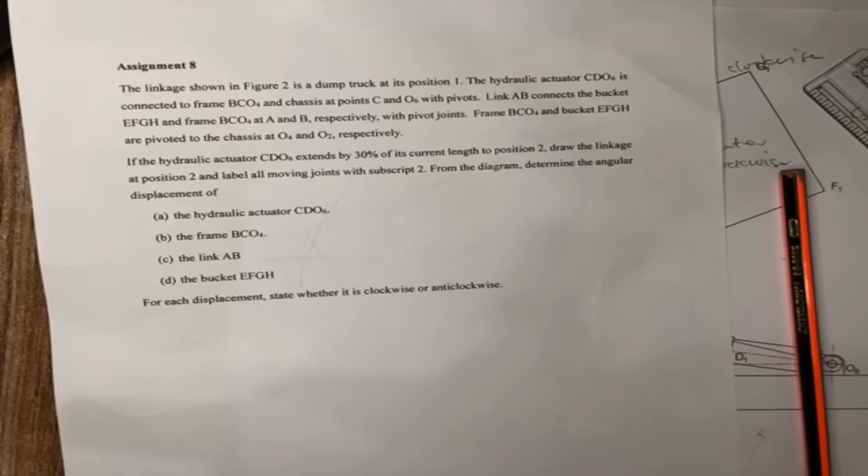We are done with the last assignment as well. So like I stated earlier, I will go over the specified fixed pivot problem and then go through it again and give you the solution, probably by end of today or early morning tomorrow. Thank you so much.